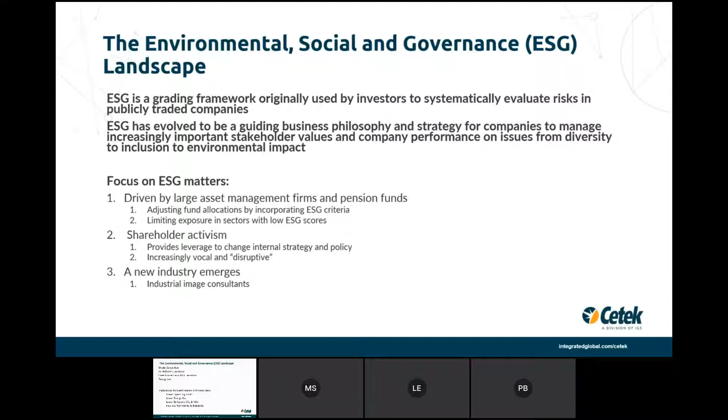So no longer is it only returns or future capital improvements, but it's also, are the investments that we make sustainable? So all of these companies have this as part of their focus, and their investors are interested in the ESG scores of the companies that they invest in.

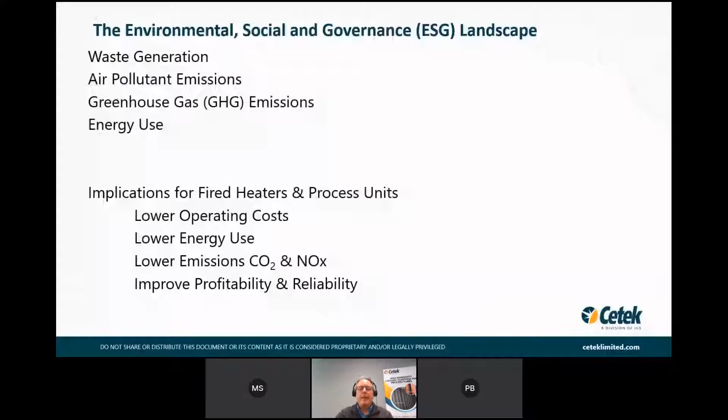So my name's Larry Amsch. I'm responsible for the Cetek product line, which is actually part of a full menu provided by Integrated Global Services. So what I should say about that is that we offer a whole product line that's based on proprietary high velocity thermal spray, which is uniquely suited to combat corrosion in units like amine vessels, etc. We also have created and perform a variety of online services that we call Hot-tek. And in that product line, we're repairing fallen refractory, we're cleaning convection sections or descaling hotspots on tubes. It's all about maintaining the process unit between turnarounds.

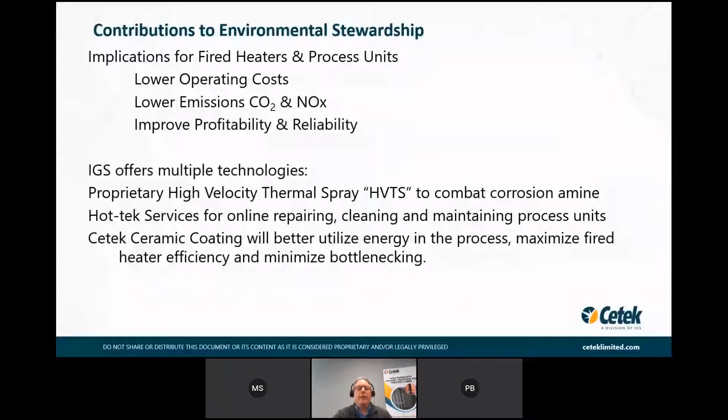I'll mention two of those services at the end of this presentation, but our focus today is on the Cetek ceramic coating product line. So this is a proprietary thin film ceramic coating that we have designed to operate at exceptionally high temperatures. So that's why it's such a great fit for fired heaters. So we have coatings that go on the radiant tubes as well as refractory surfaces. And all of that is about improving the radiant efficiency, keeping the operational reliability intact, and of course, lowering emissions along the way. I thought it might be a good place to start to just get a sense of the

variety of heaters that we typically work on. So if you're in downstream, most of these heaters would be names you'd recognize. Under the steam methane reformer family, whether it's hydrogen reformers or primary ammonia reformers and fertilizer plants, they all have that potential to enjoy not only the fuel savings that you see there and productivity benefits, but folded right up into that come the CO2 and NOx savings along the way.

And I did want to make sure that I pointed out there's two families of coatings that we look at, that we've developed, and we use them independently based on what we can do to maximize the benefit within a given heater. Because again, it's about the right coating on the right surface area in order to get the longest benefit possible. Because these coatings last multiple years. Think of it as 2 turnaround cycles. And it's important that we have a full view of each of those heaters.

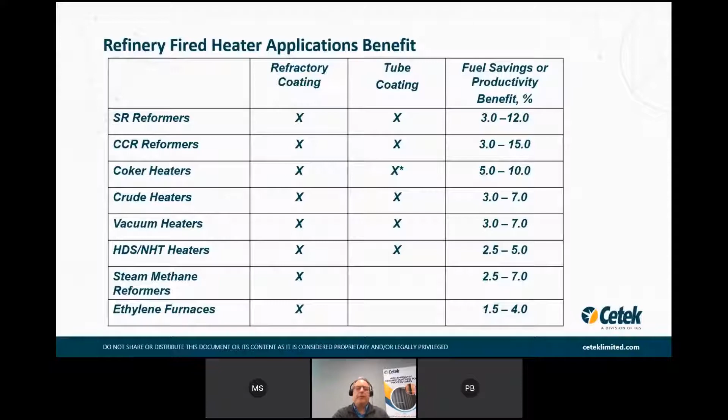So let's go to the basics for a moment. Radiation, furnace radiation. So how efficiently the radiation is transferred to the radiant tubes is all about emissivity. A zero emissivity would represent a perfect reflector, not what we want, right? We want to have a black body situation, meaning an emissivity of 1. What that really means is the radiant energy that hits that surface is absorbed and re-radiated back into the furnace chamber over a broad spectrum wavelength. So that creates the opportunity for the maximum heat transfer. So if the ultimate enclosure is an emissivity of 1, anything less than that simply means that we're losing heat transfer efficiency, we're wasting energy, using too much fuel, elevated bridge wall temperatures, essentially creating unnecessary CO2 and thermal NOx.

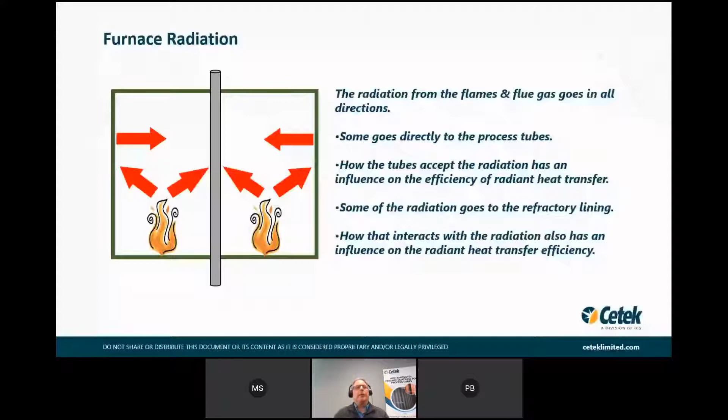So let's take a look at the first family of coatings, the high emissivity ceramic coatings, which are specifically designed for refractory surfaces. So when you build a fired heater, refractory, there's a lot of versions to be used, and they're chosen for their affordability, ease of construction, their superior insulation value, all the things that go in and make perfect sense in building the unit.

But the one piece of that puzzle that falls short is the actual emissivity. And you can see by the chart, think of ceramic fiber board and blanket at the low end of 0.45, working your way up the ladder on brick and castable. We want to take all those low emissivities, all those inefficient numbers, and bring it up to 0.92 with our ceramic coatings.

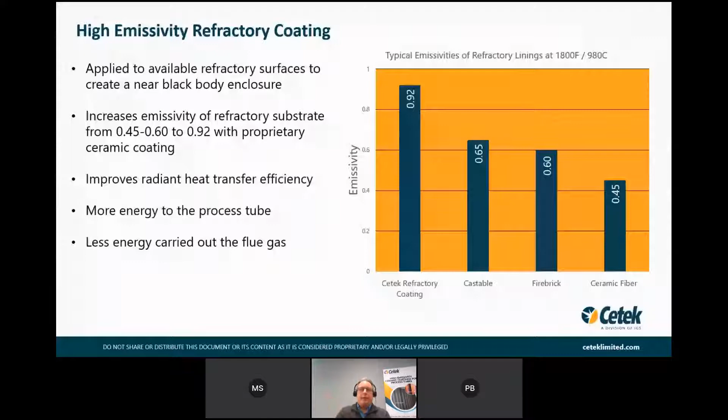By moving that, we're getting much closer to the black body, the 1 emissivity. So putting the coating down increases the radiant heat transfer that you would normally see at a lower rate of 0.45. Re-radiating more energy back into the process means you need less energy overall for your barrels per day, and you have less wasted energy going out the stack.

I did want to touch on some of the background calculations. Lobo and Evans and others have produced this mathematical explanation in terms of high emissivity coatings, how they actually work, and how it improves the radiant heat transfer from a refractory surface to the tubes. To be fair, this calculation does not consider the radiant heat going directly from the flame or flue gas to the tubes. But in this calculation, it does show how the radiant heat from the walls can essentially be doubled.

So to maximize QR, or the heat transfer, F must be minimized. By increasing the emissivity from 0.45 to 0.92, F is then reduced, and therefore you're increasing QR. It's behind the scenes on the calculation side, but it is absolutely legit science for this technology.

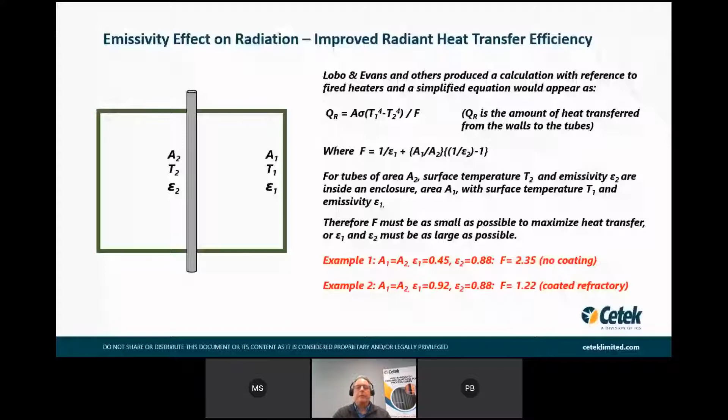So long story short, high emissivity refractory coatings absorb and re-radiate the energy back into the process in a more useful wavelength. We're reducing your fuel firing, therefore you're lowering CO2 in kind. And if it's a more efficient radiant section, by default you're lowering your bridge wall temperature, and therefore you're lowering your thermal NOx.

So the two go hand in glove. Now, the beauty of the technology is if you're in the busy season and you need to kick up your production and you want to take advantage of the savings from the coatings, you can do, let's say, 8% more barrels per day instead of on the savings side. You can shift as your demands require year over year, over 2 turnaround cycles. A lot of flexibility from the coating itself and how you want to use it. So from our perspective, why wouldn't you maximize the radiant energy capture rather than simply letting it exit the stack?

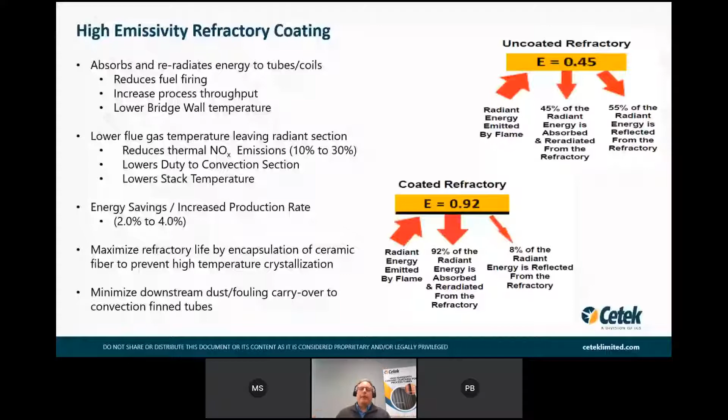I would also say, in parallel to the CO2 and NOx, there's another environmental win, which is the encapsulation characteristics that you get from ceramic coating. On ceramic fiber, which we all know at some point will become oxidized and will tend to dust, that dusting crystallization will end up going downstream into your convection section. It's not a good situation, certainly in the long term. So if you apply a ceramic coating to that surface, it will stop that crystallization, which is one of the root causes of that fouling.

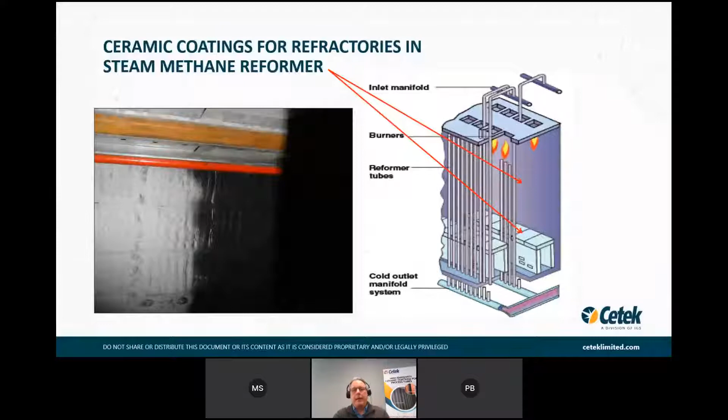I guess I would say it's important to recognize that rigidizer is a product traditionally used in the industry to solidify that fiber, and it does a fine job in the short term. We want to do something more than that and cover it entirely with ceramic, because now you've got the emissivity to help on radiant efficiency, but you also have the whole encapsulation to prevent downstream dusting. Again, another adder to the whole environmental equation.

All right, so we just talked very briefly about the ceramic coatings and refractory. Let's pivot to the tube coatings. This is the other family that's formulated specifically to be applied to metal. Regardless of the metallurgy involved, we coat 2 1/4 chrome tubes, 5 chrome. The most popular is 9 chrome, 1 moly.

All of these surfaces are going to oxidize. At some point, you're going to have objectionable scale, which leads to the problem: the oxidation is a barrier to the conductive heat transfer to the process. So you're taking a hit on your efficiency, you're losing barrels per day, you're impacting your margin, all the things these units are not made for. We want to run that at optimum efficiency for as many years as possible.

So in every case, on the process tubes in these fired heaters, it's a great situation to lock them into a like new condition with the ceramic coating, because it is a barrier to stopping the scale from growing. Rather than trying to turn up the burners and overcome the insulating scale, let's lock them into a new position, a like new condition.

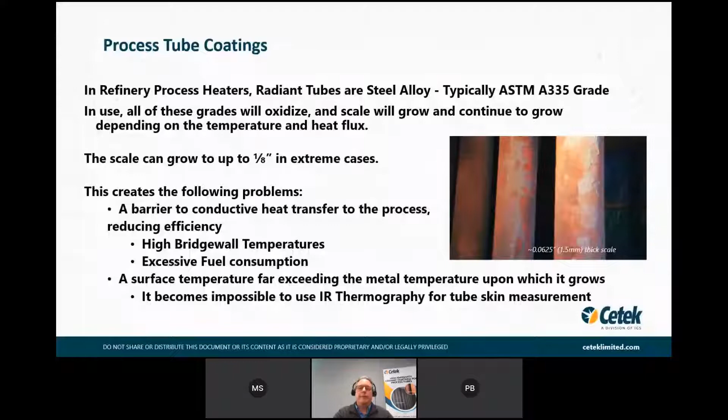I wanted to talk a little bit about the heat transfer coefficient, because it gets into the thickness of the scale, et cetera. People ask about the insulation value of the ceramic coating. Our thin film ceramic coating transfers heat just about as good as bare steel would, a brand new tube. But a brand new tube, as you all know, it isn't long into the first year where the scale begins to grow and continues to grow for quite some time.

So if you have scale, that's interfering with the transfer of energy to the point where it's about half as efficient as ceramic coating. It is a legitimate impediment.

So what do coatings do? They elevate and maintain the radiant efficiency in the years to come, and stop the metal loss from the tubes themselves. So again, you don't have to overfire, you're saving fuel, lowering CO2. Also, if you're fighting carburization, outside diameter carburization, we can bring that benefit to bear with the coating. So if you want to seal off that surface and prevent carburization in the long run, that's exactly what ceramic coating brings to the table on the tubes themselves.

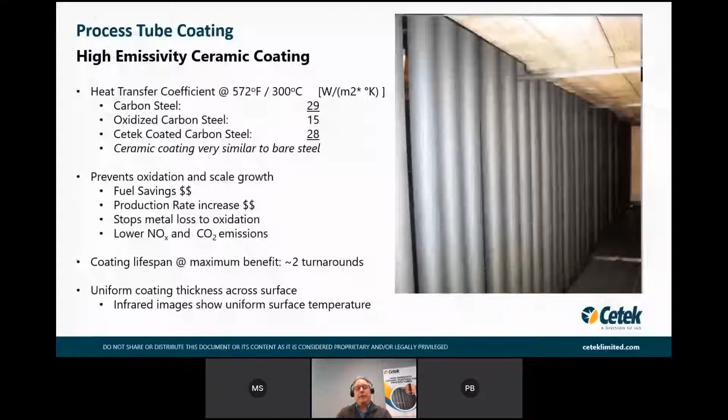Let's look at IRs for a minute, because we all live with those reports and know how they can be problematic, especially if you're pushing the unit a bit and wondering what your tube metal temperatures are. Well, the beauty of ceramic coating is we have a known emissivity and a known coating thickness, and so the heat transfer coefficient can be used to calculate the tube metal temperature.

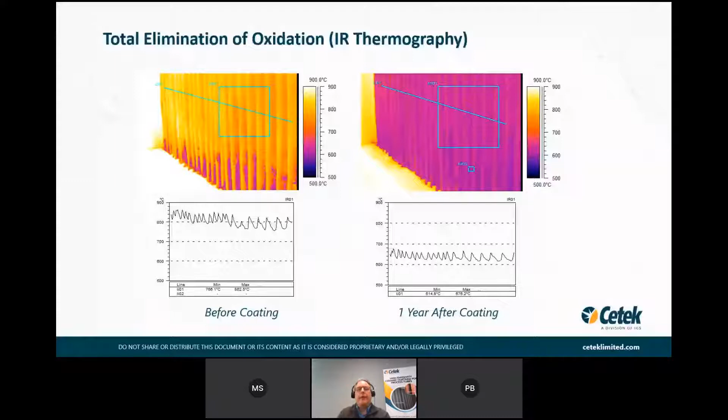But after coating, if you look at the shot on the right, the thin film ceramic coating stops oxidation. The IR shot shows that coating provides a much lower barrier to conductive heat transfer. Now the delta T between the tube metal temperature and the surface temperature is more like 40 F or 20 C. At the end of the day, this is exactly the improvement you want in your fired heater efficiency. This would be about an 8% fuel savings, an 8% CO2 savings, and that comes out to about a 15% NOx reduction also. All of that folds into exactly how the coating is going to perform, and we thought it would be a great way to show, if you will, one year later.

Okay, so environmental emissions, right, under that umbrella. Obviously CO2 is directly related to the fuel consumed, and we can make an impact there. NOx is related to the flue gas temperature, and we're lowering that bridge wall temperature without a doubt. And I mentioned the particulate, meaning we can lock in the refractory fiber so that you don't have downstream dusting.

At the same time, we're lowering the operating cost, lowering fuel consumption, and improving reliability because of the infrared images, so you can maximize your production without being concerned about crossing some sort of safety envelope on hotspots on a tube. We're preventing OD carburization, and all of these roll up into a long-term performance package.

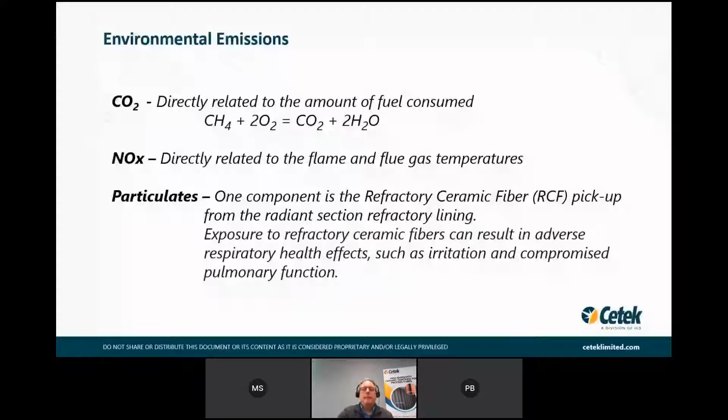I did want to say something about NOx. It's important to mention there are multiple sources of NOx, and thermal NOx is what we're really referring to here. So when we look at your heater, our evaluation process requires us to consider tail gas, purge gas, refinery gas, and fresh gas, because that varies by the plant and the heaters themselves. We look at all of those data points and components to make sure we have a full understanding of how we can impact the efficiency of that unit.

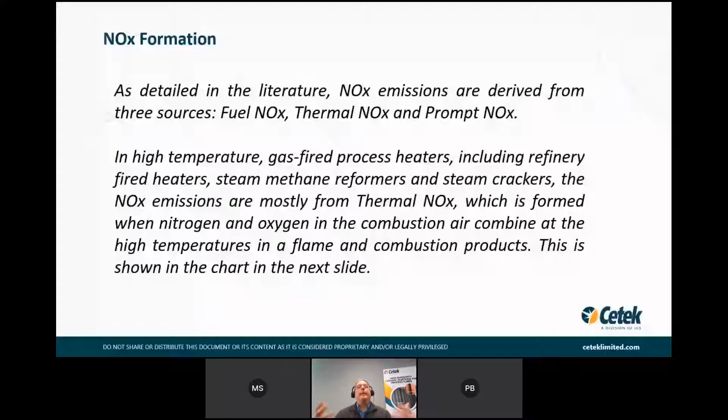As a matter of fact, more hydrogen in the fuel means less CO2 reduction. When we look at heaters around the world, you could see a range of hydrogen from 5 to 50%. All of that rolls up into our modeling and evaluation, and subsequently the recommendation we would make for your heaters.

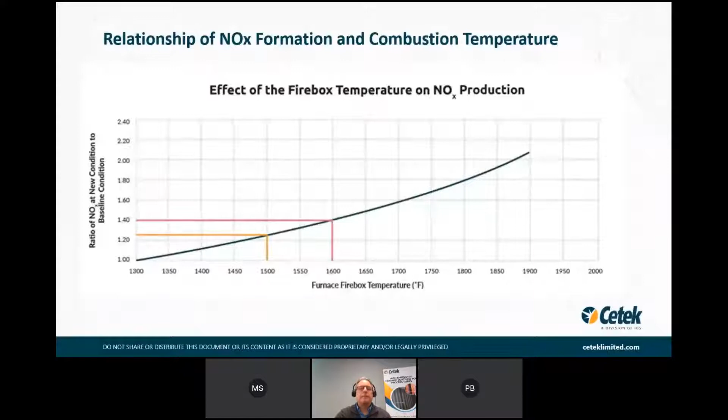So let me catch my breath for a minute and give you a sense of NOx and CO2 by heater family—this will give you a sense of the average emissions we've seen in the past. Our process is to look at your specific design, your actual operating data, and marry that together with infrared images if required. Then we can model the best benefit of the combinations of coatings and surface area that we think can deliver the longest performance for you.

That way we can come back to you with a return on investment, a price, a timeline, and all the safety documents required, because at the end of the day not only do we own the process, but we're the applicators of the process. So for us, it's a turnkey relationship with you.

We want to be in front of your process engineers, your safety folks, and work in tandem with your turnaround people to make sure all of those fit together so you have the right project at the right turnaround. Again, this is our business model, but these kinds of percentages are exactly what we would expect to see from those different families.

I'd also want to say two things: the coating life really lives in that 2-turnaround window, where you get the maximum benefit. At that second turnaround is when you're going to make your next economic decision to replace the coating and consider your payback. That's exactly why we want to be in touch with you, not only before the project but after the project to do a post-coating evaluation. And then of course we would get involved with you at each subsequent turnaround to see what supports your production plans in the future.

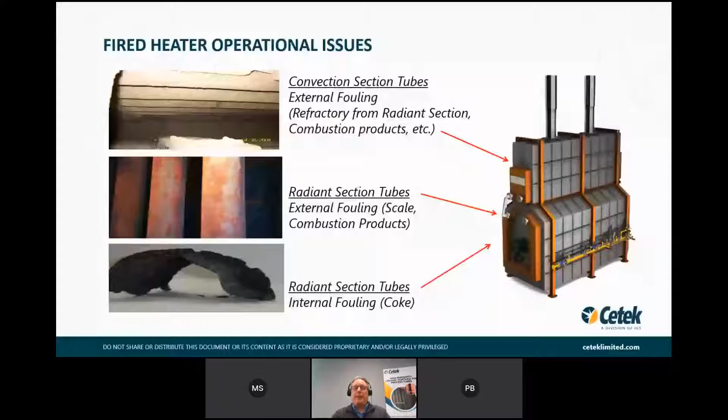That begins with looking at your design specs, because we want to look at absorbed duty, radiant efficiency, inlet and outlet temperatures—all the things you would love to have in a brand new unit. We're going to figure out how close we can get you back to that situation, and of course hold you in that position for as many years as possible.

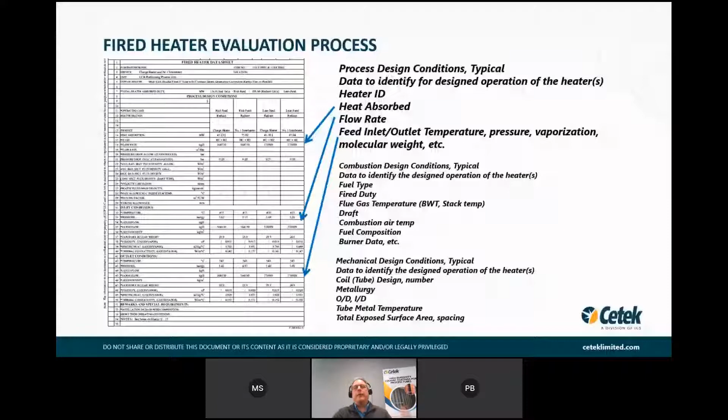Here's a snapshot of a case study I thought would be interesting. In this case, it's a catalytic reformer—a relatively mid-range, smaller unit, 16,000 barrels a day. If you look at a 6.5% benefit, that's kind of in the mid-range.

We have a lot of benefits that are higher than that. But in this case, I thought it was a great picture for the culmination of, for instance, fuel savings. This customer is looking at just over $1 million in fuel savings. And in their world, CO2 is emerging very quickly, so it's a great value add for them. There's another $500,000 in CO2 savings right there. So just on the fuel and CO2 component, this customer is getting a payback of less than a year.

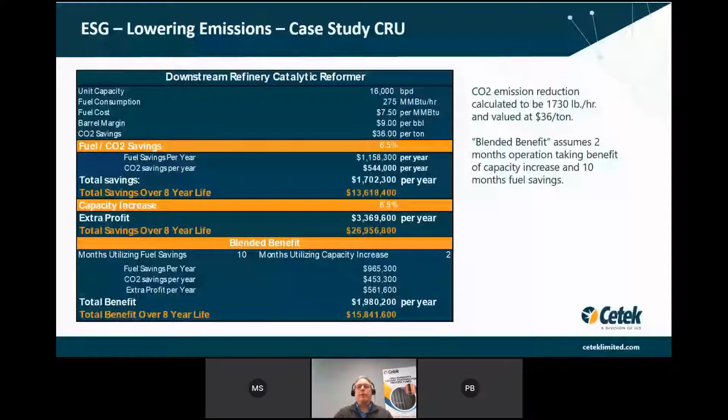As I mentioned earlier, you have the ability to pivot during the life of the coating. Some customers look at it as over the course of a year, I'm going to have 10 months of fuel savings and then just 2 months of what they call the busy season. And so you put that together and you're still looking at a benefit of less than a year. So it's all a matter of combining your operational expectations in the future. If you're in the unique position of having to just full on capacity increase, well then, the payback is less than 6 months. So all of these variables are important for you to make the right business decision, but that's why we need the relationship to work with you on all of the components that come into this.

So let's pivot to a different fired heater, a different size. Here's 23,000 barrels per day. As I mentioned, 9 chrome, 1 moly, pretty common tubes for us to coat. A good bit of fiber on the walls, a little bit of brick. And this is a low end of it. We took this just to give you a sense of the range that you can have. And that's why every heater has to be looked at on its own merits.

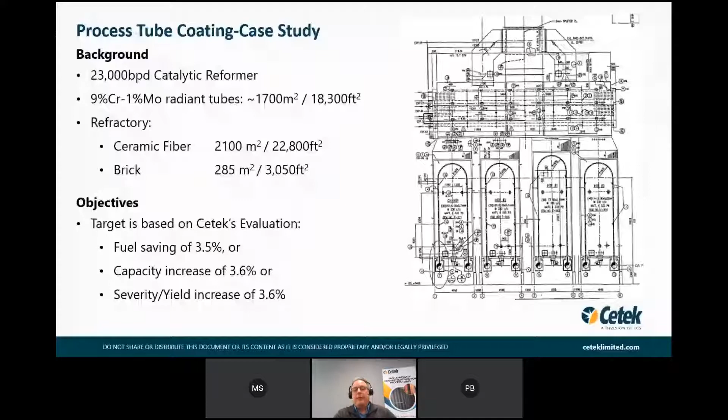So here we're looking at a 3.5% fuel savings capacity increase. And in some cases, folks take advantage of process severity. So at the end of the day, as I mentioned, we do our pre-evaluation and we have full support as a post-evaluation for the coating. And you're looking at the kind of results. These are the agreed upon results with our customer.

So process absorbed duty, fantastic, it goes up. The fired duty in all the cells going down, exactly the things you would like to see from a customer. Quick payback on this. Because they were in a unique situation of taking advantage of the capacity increase, it paid itself back in 6 months. And then, because of the life of the coating, you continue to get that payback. It's a real win when you think about it, getting any turnaround is looking for the best projects possible and the greatest payback. And if you're talking about a 1-year payback on any project, certainly those are worthy of consideration in almost any turnaround I've been involved with.

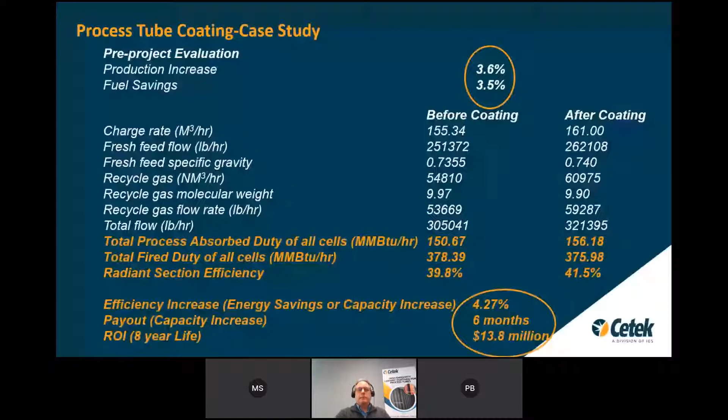But what does that really look like on the infrared side of it? I wanted to go back to that for a minute and just emphasize how important the reliability component is here, because we have a situation where the infrared on the left is typical of what we see when we take our FLIR cameras out and take shots. And you're looking at about 650C, 1200F. We want to get you to what the shot is on the right. We want a much more uniform temperature. We don't want to worry about hot spots. We want to be able to have your tubes look like that year over year. And that's where the real win is, especially on the operating side. You're not having to guess your tube metal temperatures. So again, a nice snapshot in terms of the life of the coating, because that's always a great question. How long does it run?

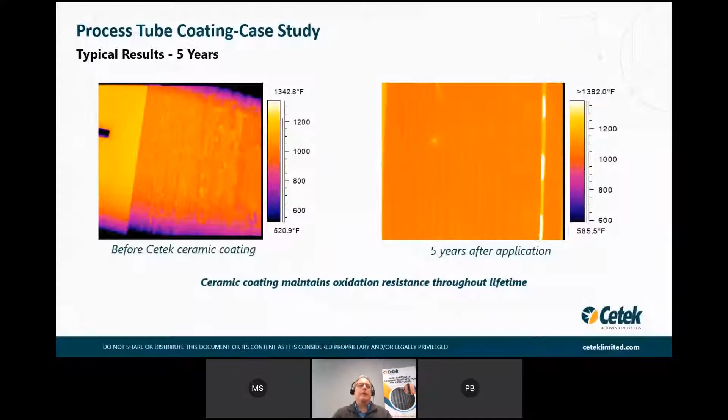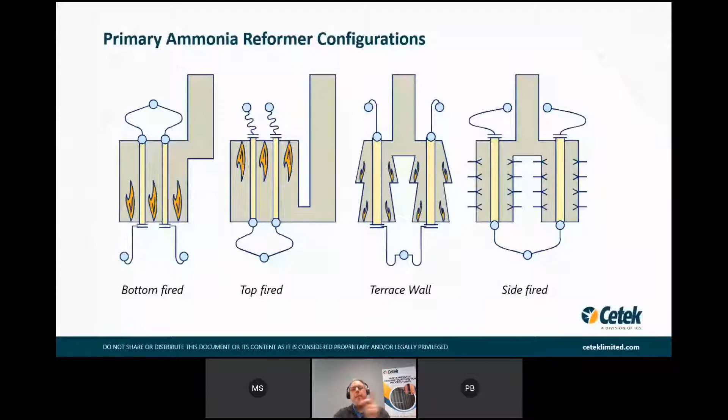So now I want to talk about primary reformers for a minute, just because we touch a lot of different families. Obviously, there's a lot of configurations out there: top fired, wall fired, terrace walls, lots of rows, not many rows, all those things. Those are all important because we have to be able to marry in the emissivity of the coating, the best surface area to put the coating. Do you have flame impingement issues, exit gas temperature? All of those things come into play to dialing in your performance benefit.

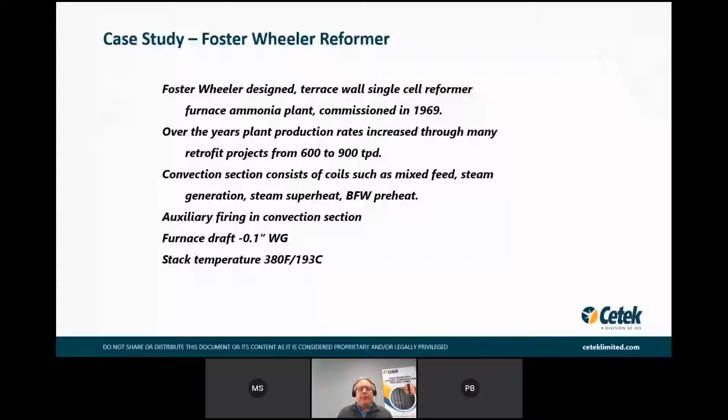So in this case, we're talking about a Foster Wheeler. Here's just a 2-slide summary of that case study. 900 tons per day, traditional convection section, things you would expect to see. Auxiliary firing, stack temperature of 380F.

Here's a snapshot of what that ceramic coating would look like getting applied. Remember, we're the developers of the process, the owners of the coating, and we're responsible not only for the formulations but the application of it. So this gives you a background of what it looks like when we're applying it.

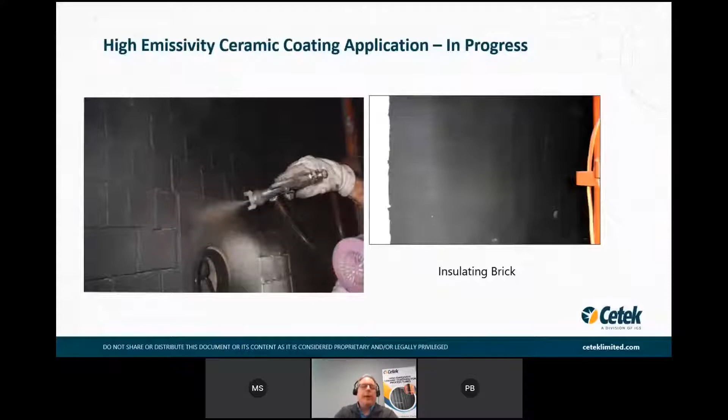Again, no VOCs. All water-based formulas. Curing takes place at your startup. There's no hold points like you'd have in a refractory, so take your unit right up to operating temperature as you will, and that's where you'll get your proper sintering.

So at the end of the day, what does that case study look like? Well, long story short, because of all the work done in that unit, it was some 600 gigajoules a day they saved. Sorting through the other work in terms of apportioning the benefit, we were left with a pretty good piece of that 600 gigajoules a day, 360. So that's a 4% fuel savings.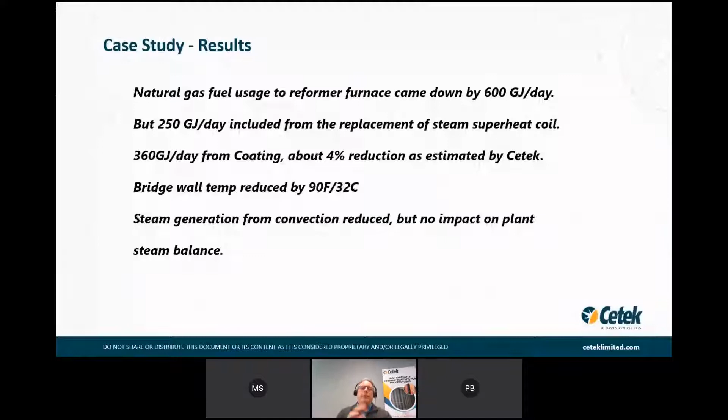Again, the CO2 savings comes right along with that, directly attributed to the coating performance. So if you lower the bridge wall temperature in this particular case by 90 F, you're essentially looking at about a 13% NOx reduction. This is why it's important for us to work with you before and after on these projects. Another snapshot from a project on an SMR.

The numbers aren't so easy, a little too small here, but if you're looking at flue gas temperature, they're down, stack temperature down, all the things you'd expect to see because the coating is doing its job from its high emissivity point of view and of course from the encapsulation side.

When you think about the ratio of fuel consumed for hydrogen production, it should decrease after the coating because you're using less fuel to make more hydrogen. And that's the win. We also lowered the NOx from 135 to 96, and the fuel consumption is in tandem with the CO2. Again, a nice win, a good brief snapshot to introduce you to our summary of the kind of performance you'd expect from our coatings.

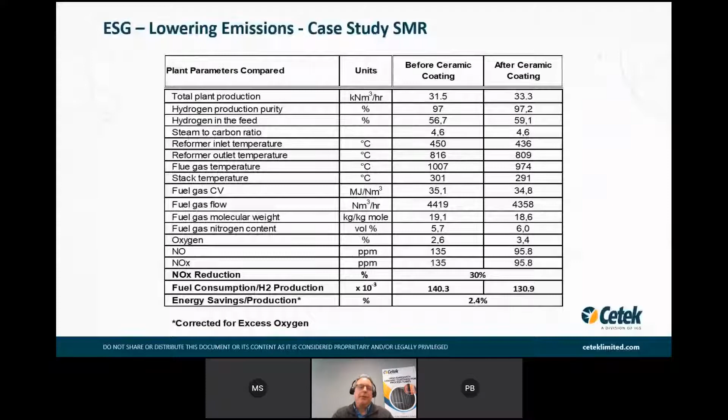Now, if you're in a unique situation, and sometimes it's a great situation because you're going to replace all the tubes in your fired heater, you're revamping. This is another wonderful opportunity to take full advantage of that coating and get it applied to the tubes before installation. We have shops where we can do that. We'll coat the tubes, cure the tubes, seal them up for safe storage. Now you've got tubes that will literally be kept in like-new condition for years, and the flexibility during the turnaround to install them at your convenience. So what a great option if you happen to be going down that road.

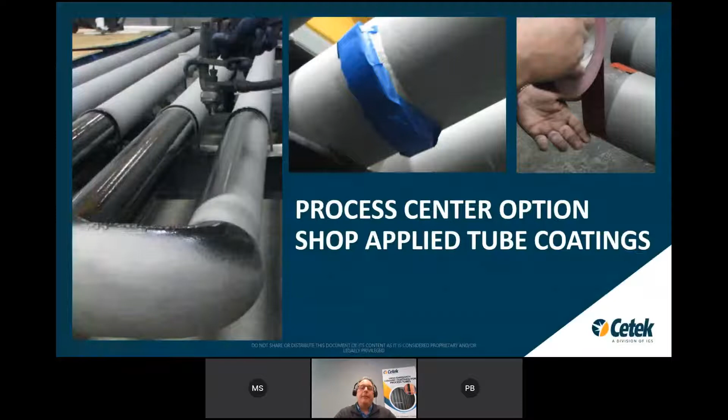Another way to extend the life of those tubes. So now I'm going to pivot quickly. I mentioned we had two of our Hot-tek services I wanted to make mention of.

The first is vacuuming of catalyst. In some parts of the world, if you're operating an SMR, you've got catalyst on the backside of that, and everybody knows that's an expensive item. In some cases that will get fouled up, and when you do, now you've got serious issues. Do you limp along to the turnaround? Do you cut it down early? Do you have a sister unit that can pick up the difference, whatever that may be?

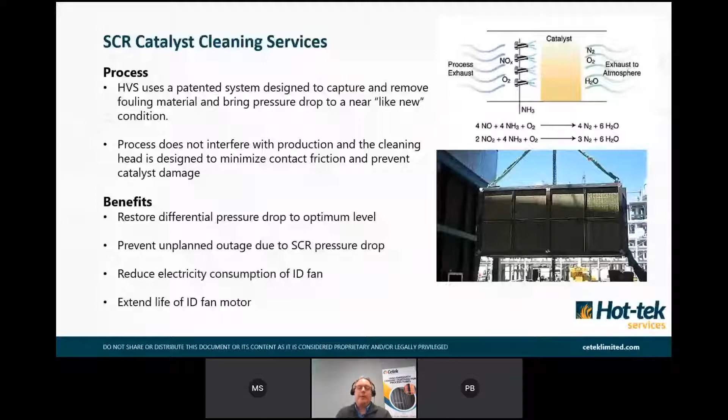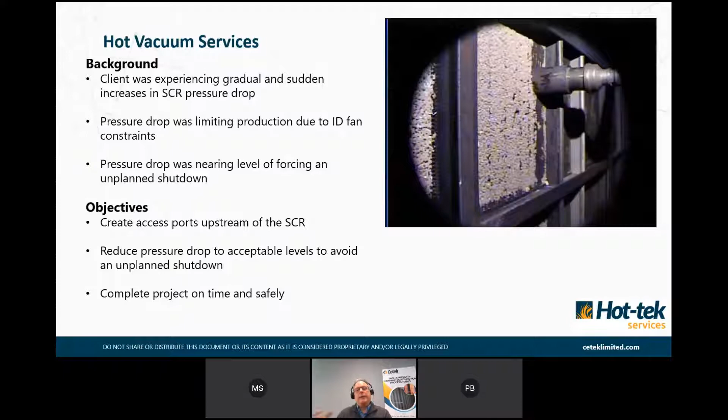We've developed an online vacuuming approach where we can enter the unit with our vacuum head, shown in the upper right-hand corner of that shot. That vacuum head is designed to pull that fouling off of each of the, I'll call them squares. There are certainly 200 of them in these situations, but we can clean that surface without damaging it, and get it done in 4 or 5 shifts, a relatively short window, but it gets you back to full operating instead of having to limp along.

So here's maybe a better before and after picture. Again, no damage from the cleaning head. We're doing it while the unit's operating. Obviously it has to be negative pressure, but you're not having to cut rate. These shots were actually taken with our Landscope, our high temperature camera, so we can view the work simultaneously. The access ports, we create those online also. So we have a nice turnkey approach for the online ability to get you back to not being in this cut rate situation.

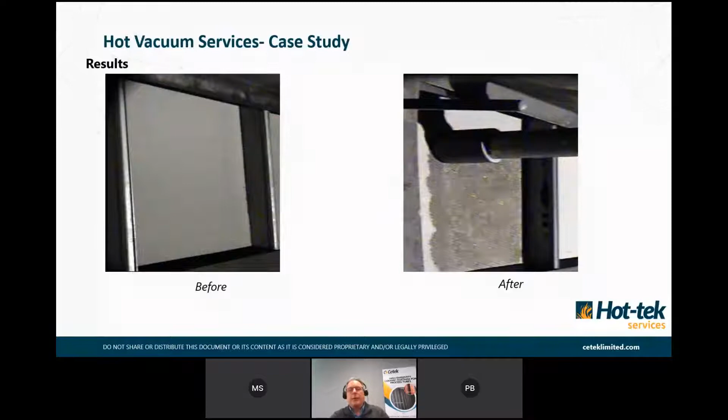It does roll up into the whole emissions end of this equation. On this particular unit, over 5 shifts, we cleaned 90% of the surface. That payback was well under a year, and it just took the better part of a week to get done. So getting the pressure drop reduced to the near starting point is a huge win for the customer. It's like starting a new run just by doing the online cleaning.

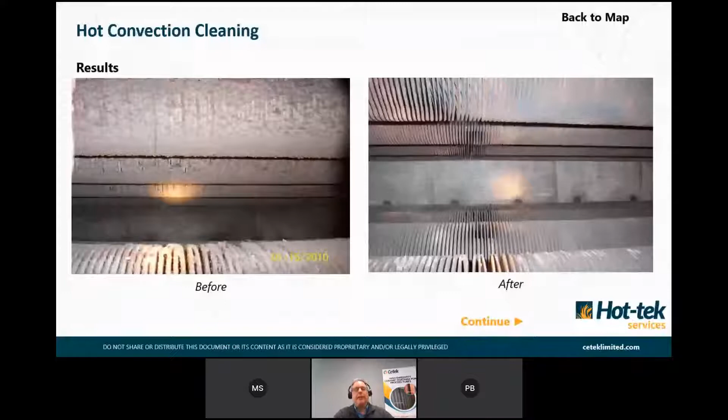But it's important to look at the real numbers at the end, because that's what really gives you the benefit. Let's look at the base case. The fired duty decreased, that's exactly what you want. The total absorbed duty stayed the same, which means we improved the heat transfer using less fuel. So the flue gas or exit temperature decreased, meaning more energy is transferred to convection tubes, so increased steam production.

This was a payback of less than 6 months. In this particular unit, they're saving 6 million BTUs per hour. If you just assign a $6 value to that, that's $300,000 in fuel saved. Then you put the CO2 on top of that, in this case about 16% of the dollar value, so about another 50,000. So you're looking at a $350,000 savings for this customer.

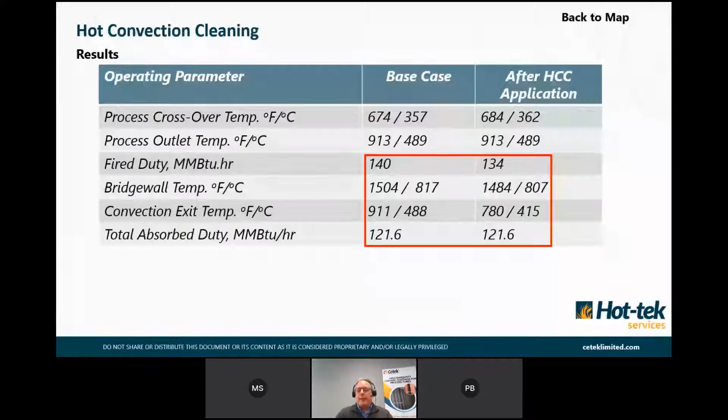That's a win. And that's what we're asking for, the opportunity to look at your situations and see what we can do to help you from a payback standpoint.

So this is the last slide, just giving a setup of what we do in terms of working off the deck. We're using line of sight with our operators, putting the lances into the inspection ports. Just a way to give you a sense of how that looks.

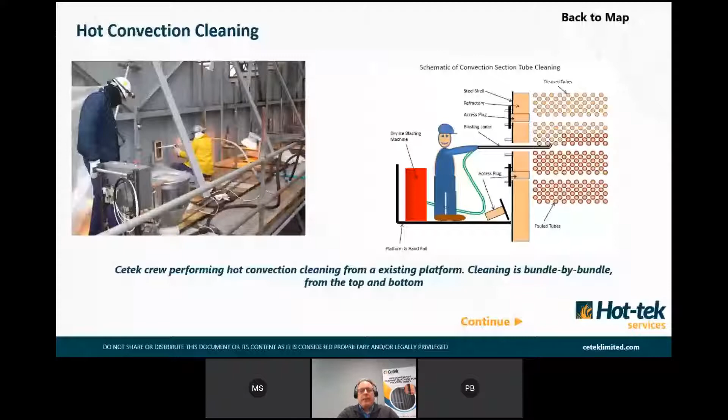Coming back to the last slide here, because I know time is short and I went a little long, but again, just a reminder of the NOx reduction and the CO2 reduction, the averages that we see among different families of heaters. And of course, we're asking for that opportunity to work with you on your particular units to dial in that performance for you.

Thank you for letting me go through that.

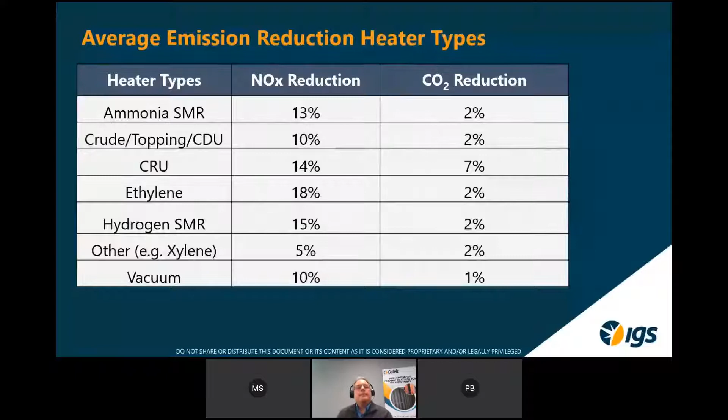First of all, we've had a few questions about the lifetime of the coating. How many turnarounds will it last, and what is the time between turnarounds? I said 2 turnarounds because that really is a great way to get close to that answer, since some folks run 4 years, some run 6 years, and all that. But the usual ideal recoating is at the end of the second turnaround. The coatings do a fine job in that 8, 10, 12-year window, so anywhere in there is the right time to shut it down and recoat.

What happens to the coating after the second turnaround? It's a do-over. If it's on a tube, we're going to reblast it, get it down to the right profile, the right cleanliness standard, and then reapply the coating. If it's on the refractory side, it's really a matter of gently cleaning, because a lot of that refractory will stay intact for quite some time. We're not going to tear the coating off a refractory, that's just not going to make sense. We'll sweep it down, blow it down, comb it down, and then reapply. So it's a little different procedure, but either way, you're getting a new coating, because that's where you get the maximum benefit for the next 10-year run.